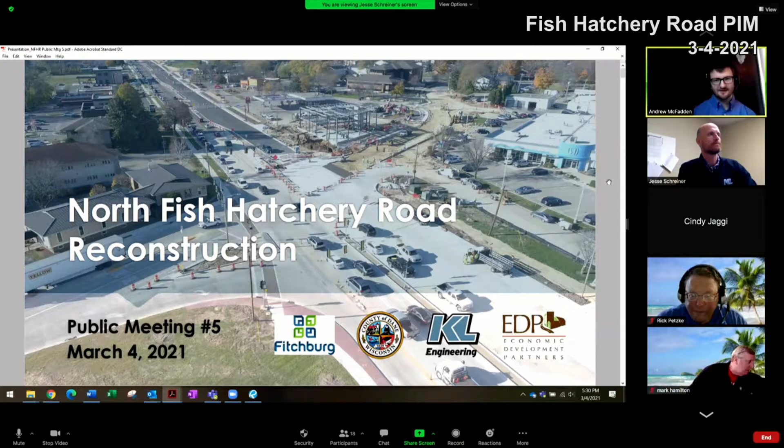This is our fifth public meeting. We're here tonight to give you an overview of what we saw last year and what you can look forward to coming up this construction season.

On the right-hand side there's a graphic that shows the overall corridor. Just a little history: outreach and design started back in '18 and '19. Last year, in 2020, we reconstructed the segment of Fish Hatchery north of Traceway Drive. This upcoming season, we're looking to reconstruct the segment south of Traceway Drive, and we'll also have a few items to clean up and finish north of Traceway Drive, and we'll dive into those.

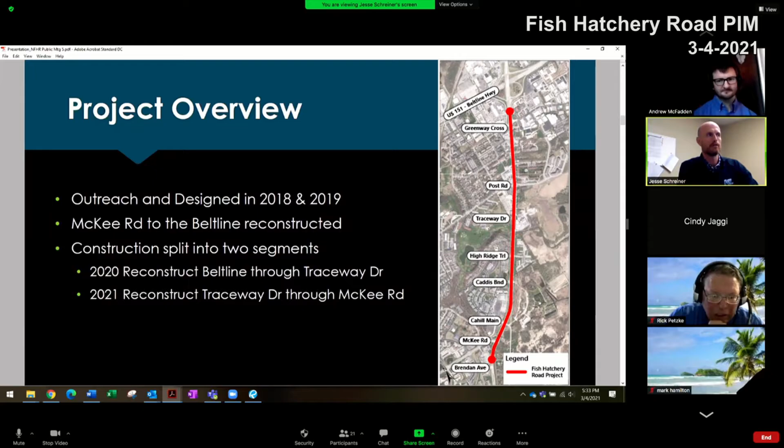Before we look forward, I also want to take a second to talk about some of the 2020 successes. We added Ochalla Drive and Bowman Drive, and also had several new developments along the corridor.

If you look at the pictures on the right-hand side, in the upper right-hand corner we have Fish Hatchery Road and Traceway. The east extension of Traceway, if you will, is what Bowman Drive is. You can see the new Highline senior living apartment complex, and then on the left-hand side is the new Krupp development.

A couple brand new projects in that corridor. In the middle of the page we have Fish Hatchery Road and Ochalla, located midway between Post and Greenway Cross. You can see the new UW Credit Union building on the left-hand side, the new detention pond in the background, and behind that there's early communication and talks of potentially extending Ochalla Drive to Index, and even developing that green space where the old tree and Bowman Farm was.

On the bottom right-hand corner, we have Greenway Cross and Bryant Road, where we installed a roundabout to help improve access in that area. You can kind of see the existing Park Bank branch office is being reconstructed there, with the steel framework being erected.

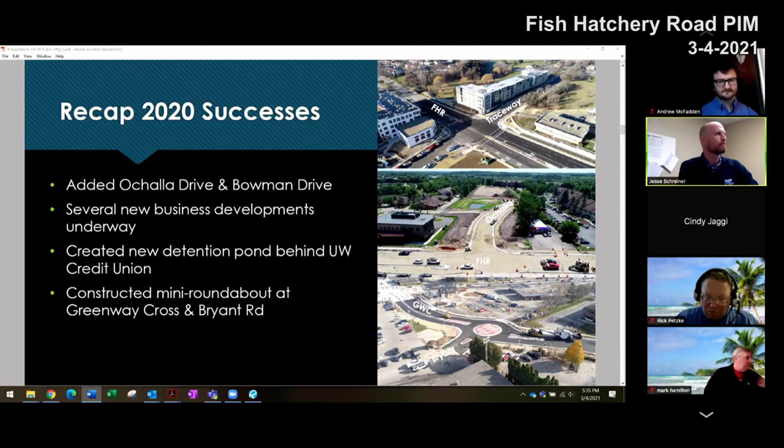Let's talk about 2021, what's coming up. Big picture with this exhibit, last year we had a couple major phases. We reconstructed the blue and the yellow, northbound and southbound, and we're following a similar pattern this year in the orange and the green. We have some extra bullet points where we're going to do some temporary accommodations, construct the orange in the northbound, then construct the southbound, and then wrap things up by buttoning up any median or loose ends. We'll dive deeper into that, but that's the 30,000 foot view.

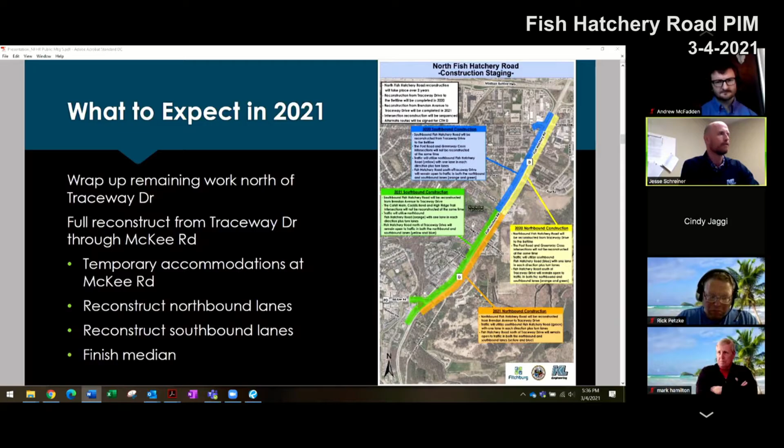So what to expect in 2021: as we noted, we reconstructed the segment north of Traceway, but we have some lingering items to button up, including installing the permanent traffic signals and lighting. If you drive the corridor, you've probably noticed the temporary lights still spanning across Post Road and Greenway Cross. So we're turning the corner, those permanent installations should be going in here. We have message boards out right now noting some construction starting on Monday.

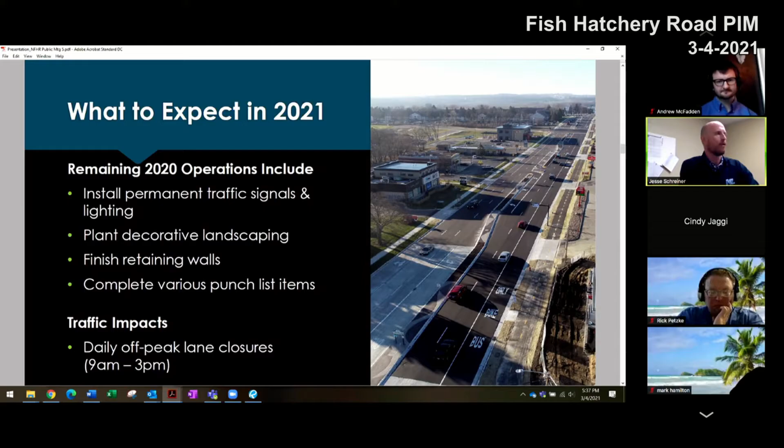So we're looking at the permanent signals getting fired up here. We also have some decorative landscaping, we have to finish the retaining walls, and then a variety of just miscellaneous little items that we'll be buttoning out. All of this, any lane closures or restrictions will be during off-peak hours, so they'll only be from 9 a.m. to 3 p.m.

Looking towards the 2021 full reconstruct south of Traceway. I know it was a pretty big graphic, so I tried to span out. If anyone has any specific questions or wants us to dive into a specific area, I've got this graphic that we can dive into. But for conversation right now, I'm going to use this and start at McKee on the left-hand side of the page.

You can see it occupies the majority of the current footprint, and the eastbound lanes will absorb a little bit of that green space out in front of Walgreens. We're also going to add a new bus stop and shelter on the north side there, close to the Cap City Trail.

Focusing more on the Fish Hatchery Road corridor, overall the road is going to have a similar feel and look profile to the existing route. However, there are some added revisions, such as south of McKee for northbound traffic - you can see there's now going to be 2 left turn lanes to turn west onto McKee Road, adding some capacity in that regard.

In addition to that, the existing bus lane starts at Breckenridge. We're going to pull that south to McKee, so any bus turning from McKee onto Fish Hatchery Road northbound will have its own dedicated bus lane. Just a reminder, all of this is part of Fish Hatchery Road likely being brought into the bus rapid transit, the BRT that the MPO is developing. So this corridor is a part of that, or at least being discussed as part of that right now.

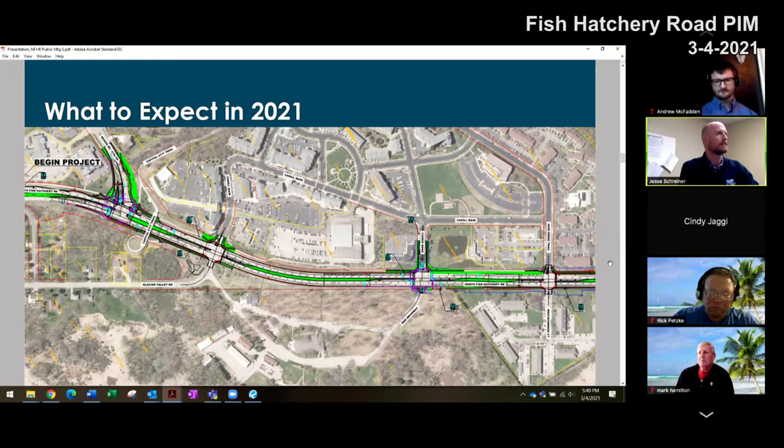So that's the final product. I'm going to dive now into how we're going to build this - dive into some of these stages, starting with the temporary accommodations.

We have some work going on at Greenway Cross next week, and the following week we'll continue on 2020 work, but with this segment, March 15th, we're looking at starting some temp widening at McKee and some operations with signals down there. We'll also be doing some removals along Fish Hatchery Road in that entire corridor south of Traceway, doing some median prep work at Caddis and High Ridge. Again, all these lane restrictions will occur outside of the peak rush hour windows.

So once we get some of these temporary accommodations complete, sorry, my mouse is jumping around on me.

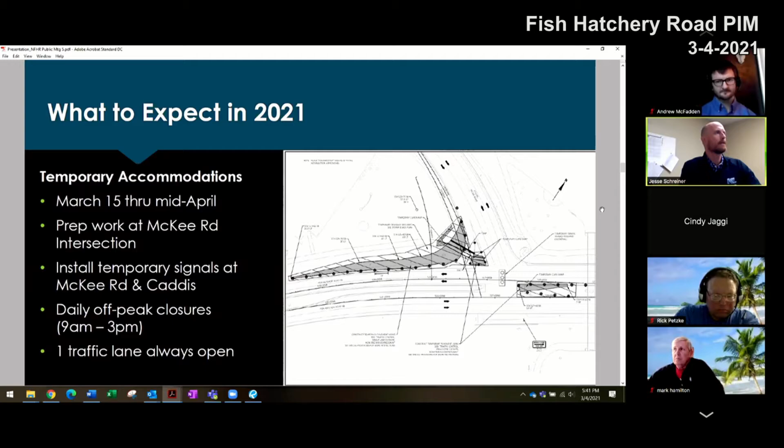By mid-April, we anticipate, weather dependent. Spring is always kind of a gray area for trying to define a schedule, so you'll have to work with us. But I would anticipate by mid-April through kind of July is what we're anticipating. We will shift traffic over to the existing southbound lanes while we construct the northbound lanes.

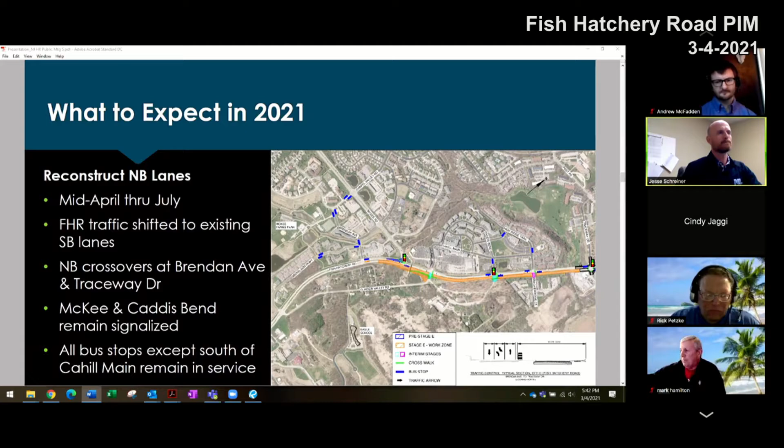Diving in closer, here's McKee. There will remain one left turn lane on Fish Hatchery Road, so that's a reduction, but it remains signalized. On Fish Hatchery Road northbound, all the traffic is shifted to the southbound lanes. You can see where they're starting to use some of those temporary accommodations, highlighted in red.

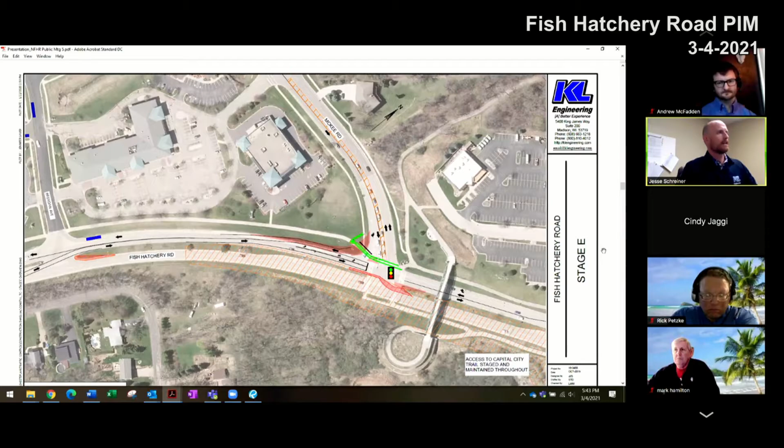Shifting north to Glacier Valley. Glacier Valley will remain open during the school year, and any closure is coordinated with the DNR driveway, so one of those two access points is always going to be open.

I don't anticipate us getting in there probably till after the school year, which actually works well with the schedule. So sometime in July, I'm guessing we're going to be closing down Glacier Valley. But again, there's always the south entrances beyond our south limits, so that'll always be open.

Continuing north at Caddis, that will remain signalized throughout the project. Again, the DNR driveway and Glacier Valley closures are sequenced.

Then you start seeing, similar to what we did last year, the northbound bus stops - we create a temporary accommodation, and those are shifted to the existing median, which, once traffic's all shifted over, would be on the right-hand side. So all the bus stops are maintained at Caddis and High Ridge.

Also want to note, at Breckenridge, since we're talking about the east side, that access or driveway entrance will be built in halves, so that will maintain access throughout. I'm sure the contractor is going to call and talk with the owner to see what kind of requirements or coordination we can do to expedite any of the work in that area. But again, that'll be on a one-on-one basis.

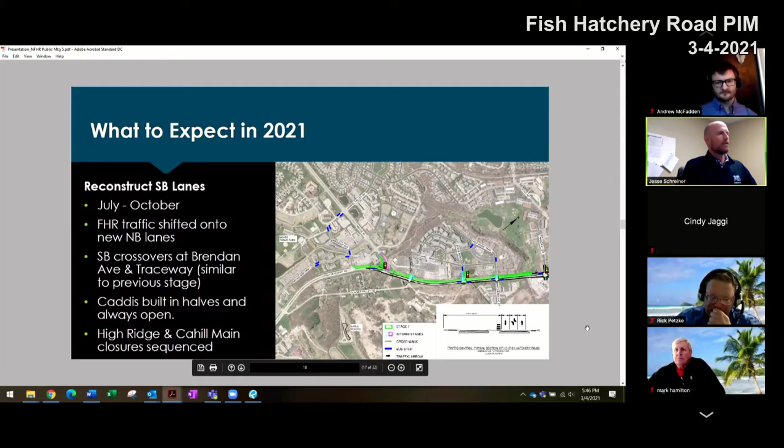Then once that is complete, we will shift traffic. If you can see, in the bottom right we have that typical section again, where our traffic is shifted over to the new northbound lanes while we construct the southbound. Anticipate this being sometime in July through early fall, likely October-ish.

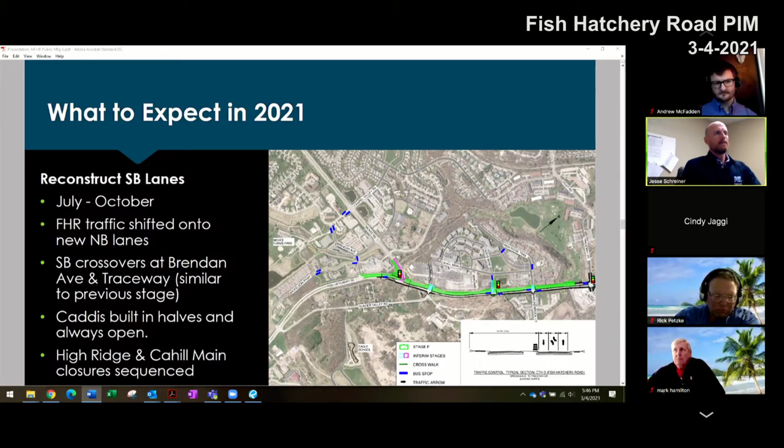Bear with me here while I'm just trying to get these in scope. So zooming in on McKee Road, starting at the south end. McKee traffic stays kind of where it is on the north half while we construct the southern half.

Maintain pedestrian or temporary pedestrian access and access to the Cap City Trail overpass. Then once we get that south half completed, we'll shift traffic over to the south half of McKee while we reconstruct the north half.

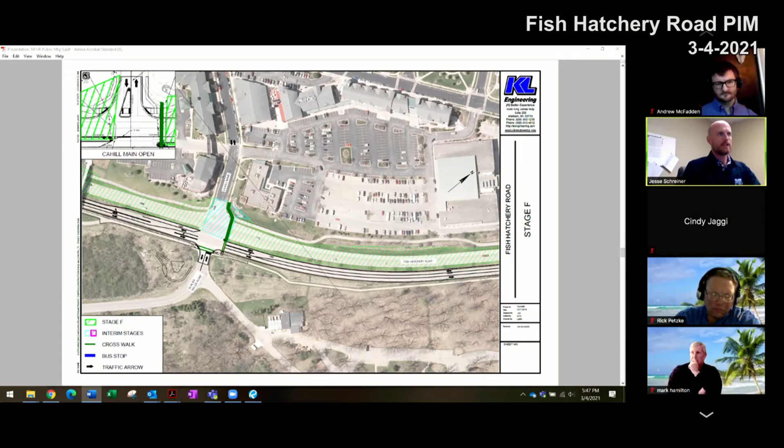Cahill - I know we're zoomed in, but on Cahill here, Cahill and High Ridge, their construction closures are sequenced, so we can only close one of those intersections at a time. So one of those, along with Caddis, will always be open. You'll always have two access points to all the businesses and residents west of Fish Hatchery Road.

And then here, zoomed in, you can see High Ridge and Caddis. With Caddis, that's going to be built in halves. It's signalized, and this will be your focus point where you're able to turn north, same as right now.

In addition, this work at Caddis cannot happen while any work is going on at High Ridge or Cahill. So as we discussed, you'll have two access points. Caddis will remain as is until High Ridge and Cahill are complete, and then the contractor will focus on Caddis and build that half at a time.

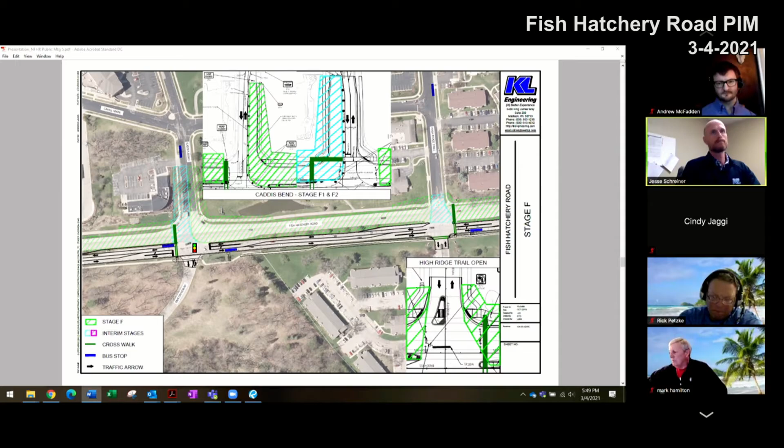So while they're working on Caddis, which stays open, you should have both High Ridge and Cahill available. And then High Ridge, I showed that already, okay.

Continuing north here, you can see Traceway, just showing the crossover there. So southbound traffic will come through the intersection and then cross over to the new northbound lane on the east side of the road and continue south.

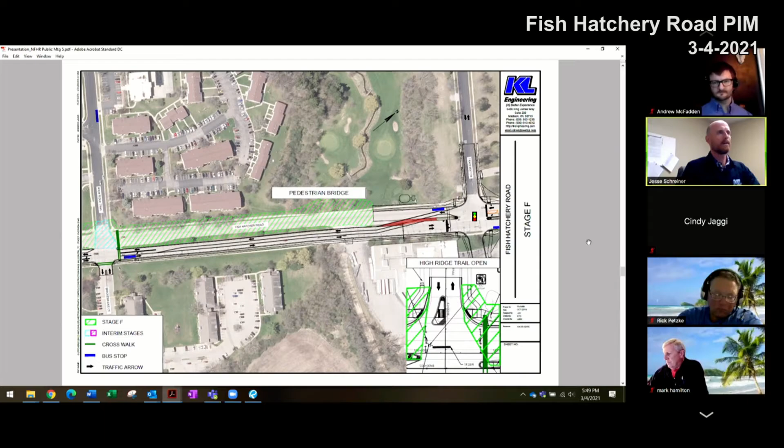And then finally, once we're able to complete those main stages, the northbound and southbound, we'll put traffic back into their final configuration, and we'll go back to daily closures between 9 and 3 while we're buttoning up the median and some of those loose ends.

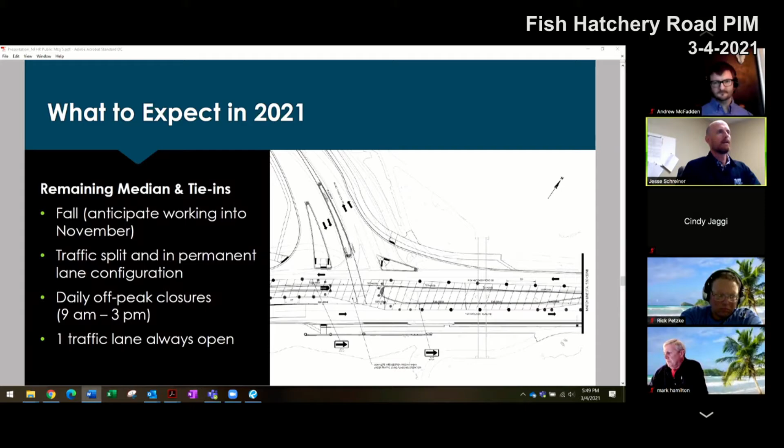I also want to note, again this is a 30,000 foot view, but similar to last year, we'll have a designated, signed bike detour route. It starts south of Brendan near Mickelson Parkway and uses a mixture of path and on-road facilities up to Cannonball Trail and Post Road, where you'll head back toward Fish Hatchery Road to rejoin.

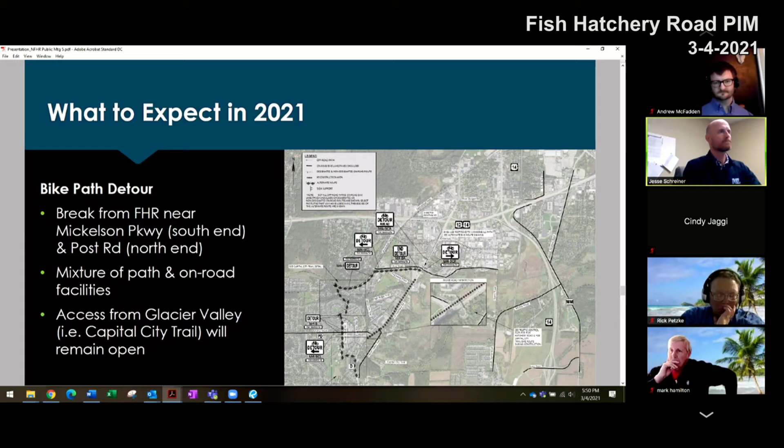As noted with the bike path detour, we also have an alternate route signed for traffic, using Highway 18 and 151, as well as Highway 14. We created a mitigation plan that can be referenced or resourced as needed.

Again, just want to highlight that two of the three intersections will always be open. Metro attends our weekly meetings, and we're in constant contact with Tim and that team. We also have a project website, as I noted at the start, and a lot of these resources, along with the existing ones, are posted there.

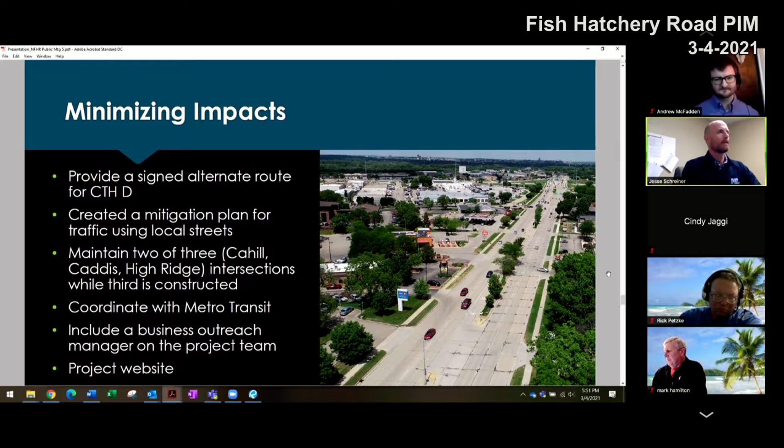This is Cindy Jaggi, and I'm the Business Outreach Manager. I was on the project last year and will continue with the project this year as well. I think it really bodes well for the city of Fitchburg that they've put resources toward helping the businesses get through the road construction.

A little bit about what I do in this position: I work with all the businesses that will be affected by the Fish Hatchery Road construction. Last year we worked with the businesses impacted then, and this year we'll continue that. I'm the liaison person with Jesse from the construction team and Andrew from the city, and we work with the businesses on whatever is impacting them.

Last year we had things like Wi-Fi cables being cut over and over again, access issues, and sidewalks in front of businesses that were impacted. My job is really to be there, just a phone call away for the businesses, to triage whatever's going on and get it directed to whichever entity can help resolve those issues.

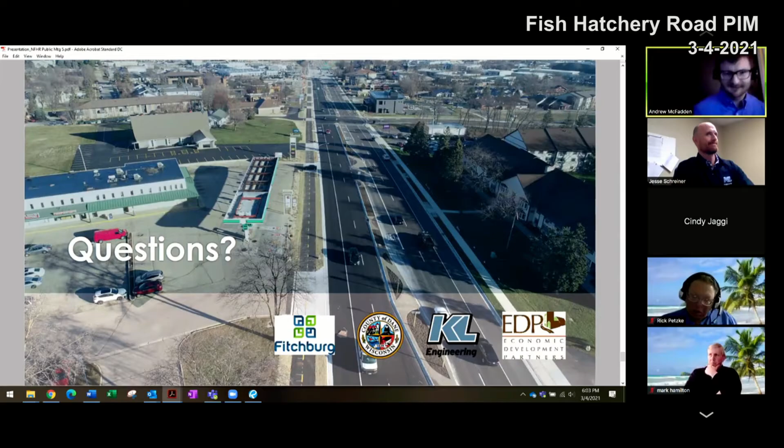Yeah, I have a couple, so may I give them all? I think that would go quicker. Sure. First, Ocala Drive - back when this intersection was first designed, it was to be Pike Drive. Is the city giving up extending Pike Drive through there?

That's a good question, Jesse, I don't know if you have any background. Right now we're constructing to the east of Fish Hatchery Road, which is the Ocala portion and is a cul-de-sac right now. To be clear, this is about the name - why isn't it Pike Drive? I believe we're paying homage to the Bowman farm and some of the people that were involved with that.

You did not mention the staging or what you're going to be doing between High Ridge and Traceway. I expect retaining wall, tree removal, and the bridge completion, and I'm wondering if you could tell us about the schedule for that, and whether there will be any beautification if there's tree removal. I'll give you the last couple of questions here.

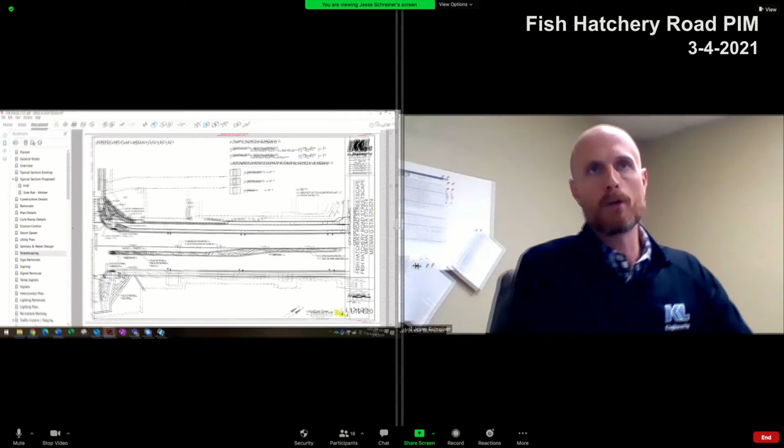So we are not replacing the trees along the west side. I don't see behind that retaining wall, but I do know that as part of the design - and forgive me, I wasn't the designer - there was communication about the number of trees being removed, and in the overall context those decorative elements were being reincorporated. Now, it doesn't look like they were in this specific area, but I do know the number of trees that were being removed were counted, and as part of that design, all of that was brought back into it.

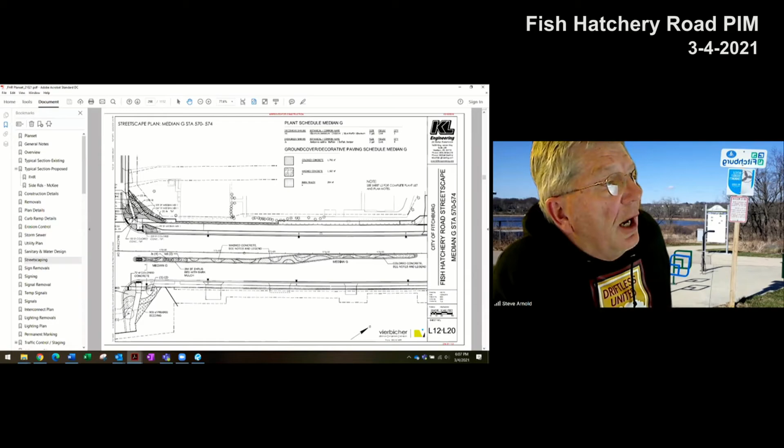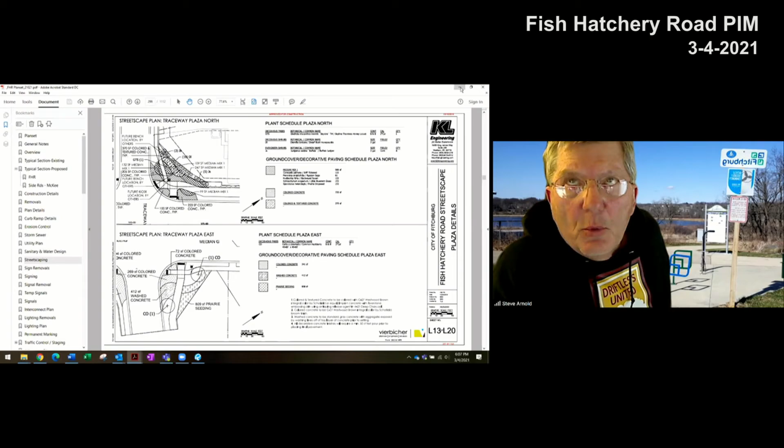Okay, and would this work - in particular, right now there's a sidewalk there, a very narrow one over the Nine Springs Bridge, and the path will be connected between Traceway and High Ridge Trail, replacing the sidewalk. When will that be done? Will that be done when the west side of the road is worked on, or all through the summer, or what?

Yeah, so right now what you see over there will remain because that's the west half. We don't address that until we can get access to it without impacting traffic. So we start with the northbound lanes, reconstructing that. Anyone walking along the west side would utilize the existing infrastructure that's out there right now.

And then midsummer, when we switch over, that'll be one of the things. If you've driven the corridor or through the area this winter, you'll notice we have the abutments - we were able to accelerate some of that construction in that area. So being offline, we were able to construct the north and south abutments. We have the bridge being fabricated, but we couldn't get it fabricated and fit in prior to what we're going to be doing this spring.

But the positive here is that a lot of the substructure and prep work for that trail will be ready, so I guess we'll be able to finish that trail right away, but we're not going to be able to open any of it anyway until the whole southbound is completed. If that makes sense.

The bridge will go in after July? Yeah, the bridge will be installed after July, correct. Thank you.